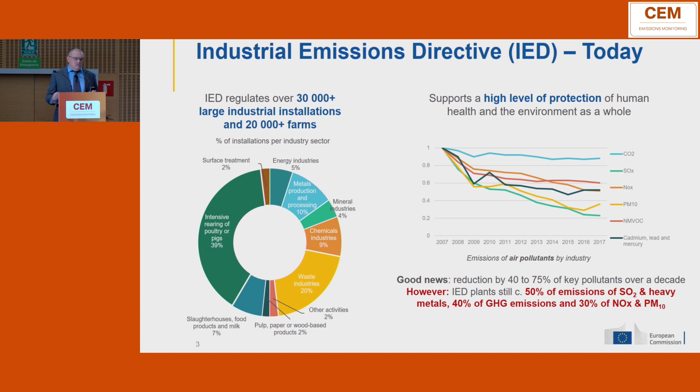Now let me explain how we process the legislation. It's a bit of a unique process. I know there are speakers from around the world here, and the way we write environmental legislation in Europe is very special, and I want to explain that to you. This is quite important and unique within the Commission. The BAT conclusions are written in a participatory process via a technical working group, which basically writes the document in a consultative process. It's very unique. This is done in what is called an information exchange, where we try to establish the best available techniques, which are documented in the best available technique reference document. That's a large document you may have seen, available on our website, for example.

So what we try to do is identify the best available technique to reduce, for example, emissions to air, emissions to water, but also resource efficiency, energy consumption, water consumption. It's an integrated approach - we don't only look at air emissions, but all environmental issues. And we try to define what is called the BAT AEPL, sorry for the abbreviation, but I will explain it - the best available technique associated environmental performance level.

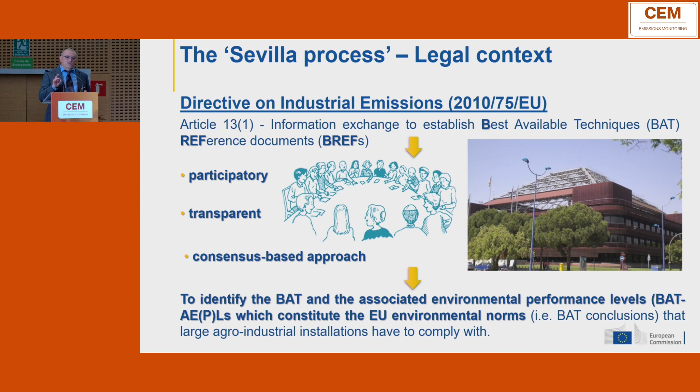You have two types. The first type is performance level in terms of resource efficiency, so for example energy consumption and water consumption - that we call BAT AEPL, performance level. Then we have a subset, which is the BAT AEL, associated emission levels. Those are emission limit values for air emissions or water emissions. So just to distinguish, we define BAT AEPLs and BAT AELs, and that is written into what is called the BAT conclusions, which is a small chapter of the BREF.

How are the BAT conclusions used? Once they are published, they are the reference to set the permit conditions. All the plants in Europe, installations operating for the sectors, operate with a permit, and this permit needs to take the decisions in the BAT conclusion essentially as a reference point.

For new installations, if a new installation comes online, they need to apply the BAT conclusion straight away. For existing installations, they have 4 years to comply after the publication of the BAT conclusions.

Very importantly, each permit of installation needs to have an emission limit value, and this emission limit value needs to be set in the range of the BAT AEL. A BAT AEL has got a range - so for dust emission, an iron and steel plant will emit between 2 and 5 milligrams per cubic meter. The competent authority has the choice to set the emission limit value at 2, 3, 4, or 5, as they wish, depending on the situation of the plant and the techniques that they may apply.

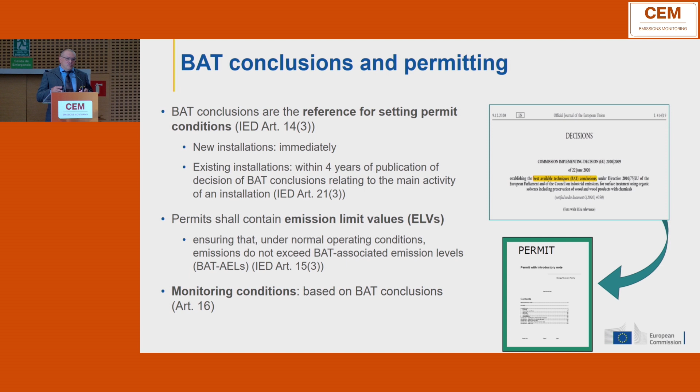Very important, and this is also a link with the emission monitoring group of Rod Robinson here - it's about the monitoring conditions. The BAT conclusion specifies some monitoring conditions, so how the pollutants that are emitted are actually monitored. It is recommended in the BAT conclusion to systematically use the appropriate CEN standard, but sometimes some pollutants do not have a CEN standard. This is the reason why we have a collaboration going with CEN to try to push forward a number of standards to advance.

So here is the process that we follow to establish those documents. The first thing we do is assemble what is called a technical working group. Let's imagine we revise the non-ferrous metal industry sector - we will call industry representatives for this sector.

We will call environmental NGOs, for example the European Environmental Bureau. We will call representatives of the EU member states, people involved - the competent authorities who are writing the permits, for example - and of course us, the European Commission, the Bureau, and people from DG Environment, who are in charge of implementation of the directive.

We do a kick-off meeting. In the first meeting, we decide what are the key environmental issues that we really need to tackle in that sector. Based on that, we develop a questionnaire, and this questionnaire is sent to a large number of installations - so it's a data-driven process.

The Bureau, so us, we actually write a first document, which includes a first draft of the BAT conclusion. This is sent to the technical working group, and generally we have a commenting period of 3 to 4 months, and then they send us back some comments.

We can have up to 2,000 comments - it's not unusual. So we need to look at all those comments, try to see what makes sense or doesn't, and we come back with a second proposal going into the final meeting. In fact, in this process there are only 2 meetings: the kickoff meeting and the final meeting.

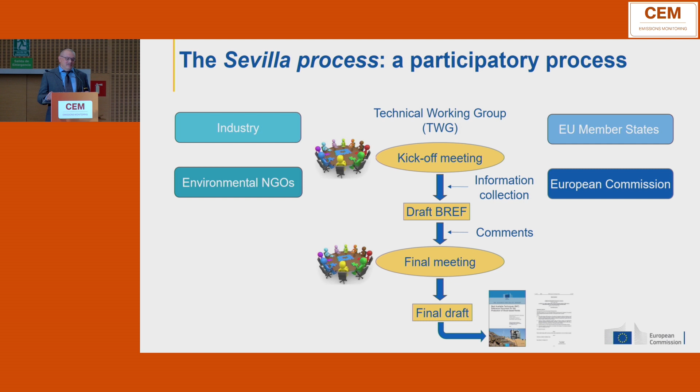In the final meeting, everybody is around the table, and we take each subject one by one. It's a huge meeting, about 5 days generally, and all the subjects are tackled. After each subject, we must reach a consensual decision - this is a principle, and we manage to do it most of the time. It's not easy, I can assure you, but most of the time we have done it. And then afterward we finalize the document and publish it, and that becomes law.

A very important part in our process, and I think this is key because people really buy into it, is that we actually look at the real performance of installations. So right from the start of the process, we look at real industrial installations. For example, we just reviewed the foundry BREF, and we had more than 150 foundries which provided data on emission, consumption, and so on.

So we develop the questionnaire, we send it out, we collect the data, we analyze it, and then we have technical expert group meetings to look at the data together with members of the technical working group. I believe this is the reason why we manage to get relatively high quality documents at the end, and a good outcome, and especially manage to get to a consensus - this is a key thing.

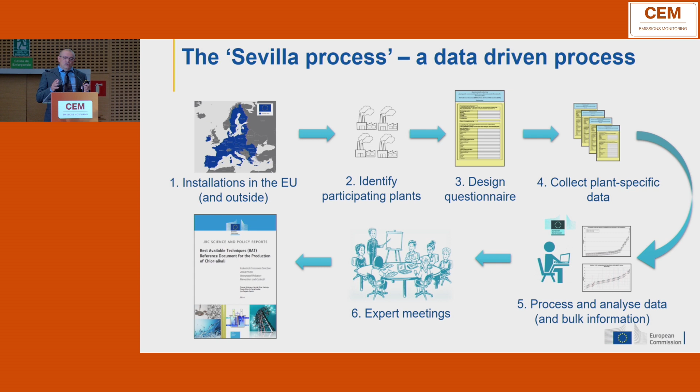Okay, Sevilla process, I think just to complete, this is the output over the last 10, well, 13 years, because the IED started in 2010, the current one. We managed to revise 32 BREFs in total. So as you can imagine, it's a huge amount of work.

As you can see here, some very important sectors, large combustion plants, large volume organic chemical, non-ferrous metal industry, for example. In this large document, you have the BAT conclusions. It's a chapter inside. This chapter is extracted, published onto the official journal of the European Union, and then implemented.

In total, to do those 32 BREFs, we collaborated with about 2,000 experts from various sectors, and our documents are downloaded about 200,000 times per year, including far away. We have even recently done some translations, for example in Arabic and also Chinese, of some of our BAT conclusions, because people are interested further afield to know more about the conclusions.

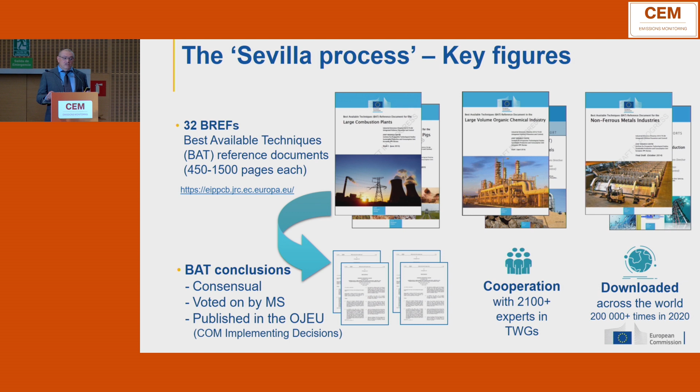Okay, so this is working well. The Sevilla process is working well. The way of making the BAT is working well. That has been recognized during an evaluation of the Industrial Emission Directive.

However, the policy context changed radically in 2019, and I think you all know about this publication of the European Green Deal. So this is a new approach which was set by the Commission, a more ambitious approach to reach zero pollution. And you have here the text: the aim is to review measures to address pollution from large industrial installations.

And we will need to look at the sectoral scope. Are we covering enough sectors? Is there some sectors that we are not covering? And also look a bit more in detail into climate, energy, and circular economy issues.

As I said, the IED has been very efficient for emissions to air and emissions to water, let's say, but for energy and circular aspects, maybe something needs to be done. So there was a clear remit for action. We had to do something, and that led to the start of the revision of the Industrial Emission Directive in 2020, already 2 years ago, almost 3 years ago.

And also, we have a kind of sister regulation, we call it the European Pollutant Release and Transfer Register, EPRTR. So this is a regulation where all the industrial installations covered under the IED have to report emissions, about 91 pollutants in total, onto a website, which is the Industrial Emission Portal. And here you can find annually all the emissions. It's a good source of information, all the emissions from the industrial installation.

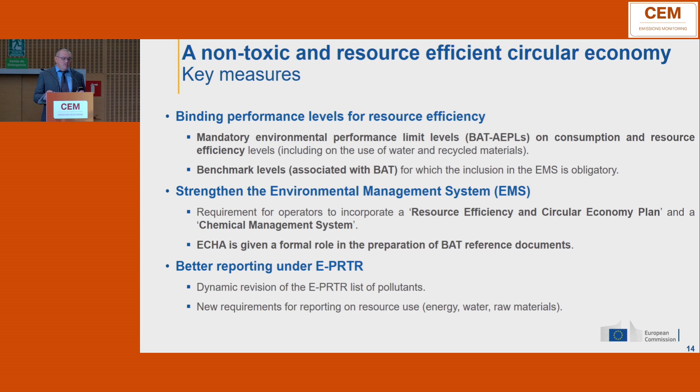There will be a new element in the environmental management system: a resource efficiency plan, a chemical management plan, and also better reporting under E-PRTR. To support decarbonization regarding energy efficiency, it is proposed also to have binding energy efficiency requirements, so that's quite important.

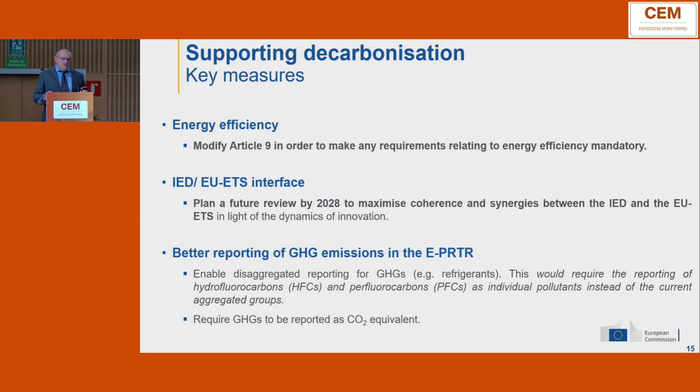And I think I can pass because I need to go faster. I really want to talk about this one. This is important: the scope extensions. A number of additional sectors will be covered.

First of all, cattle farming. It is proposed that cattle farming will be covered for installations above 150 livestock units, a specific unit for the number of animals and so on. And also lowering the threshold a bit for poultry and pig. So that is a big change. Those installations are responsible for a lot of ammonia and methane emissions, so a big impact is expected.

There are some loopholes also. For example, forging presses are not covered under the IED. It's in the metal processing part that is proposed to be included now.

Another big change is mining activities, but non-coal or energy mining, so metal or industrial minerals. Those should be covered. They are responsible for approximately 4.5% of total dust emissions in Europe. So a big improvement is expected on the front of dust emissions if they come under the IED.

Very important: the landfills. Landfills are a great source of methane emissions as well, and they are covered under the landfill directive, but that's the old directive from 1999. It is now proposed that they would come under the IED, BAT conclusions will be written, and certainly we expect to have a big impact there as well.

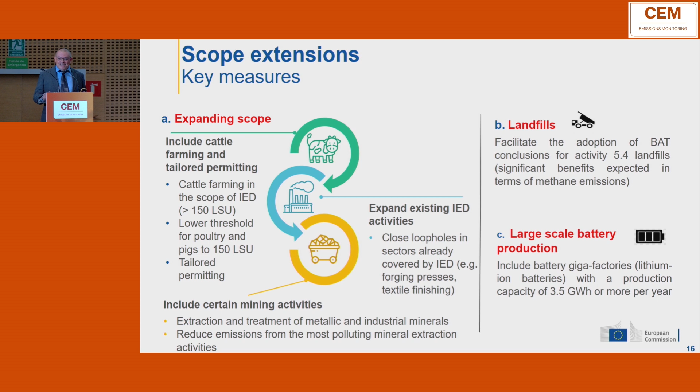It went through two legislative bodies in the Commission, the European Council and the European Parliament. Both of them gave their opinion, some conflicting opinions sometimes, but they gave their opinion. It's available online. I don't have time to explain all the issues there, but I invite you to go and have a look and see.

What is happening now, starting already in September, is what is called the trilogues. The Commission who made the proposal, the Council and the Parliament have representatives around the table, and they start to find a solution, try to find again a consensus about what will be the final text. We are expecting this final text at the end of this year, or in January 2024.